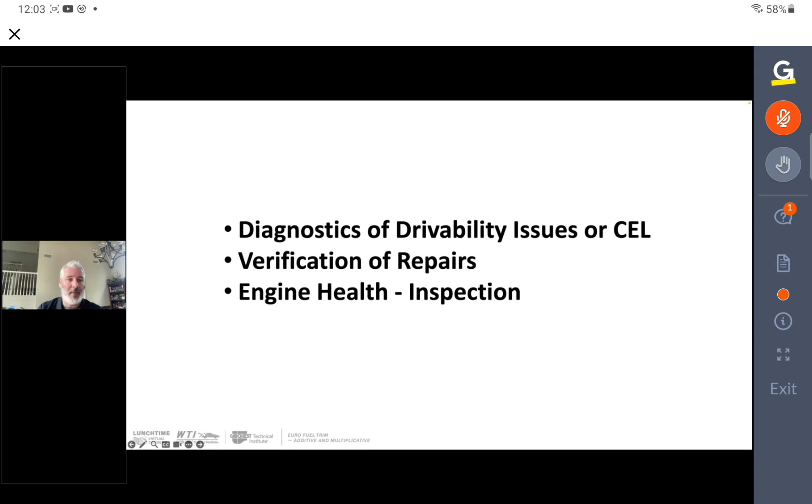It also helps you out, because the last thing anybody wants, whether it's the vehicle owner, the technician, or the shop owner, is to have a car come back not long after it left the shop with a check engine light on, saying, hey, ever since you guys changed the oil, now this check engine light is on. So if we can catch that and prevent it from happening, that's beneficial.

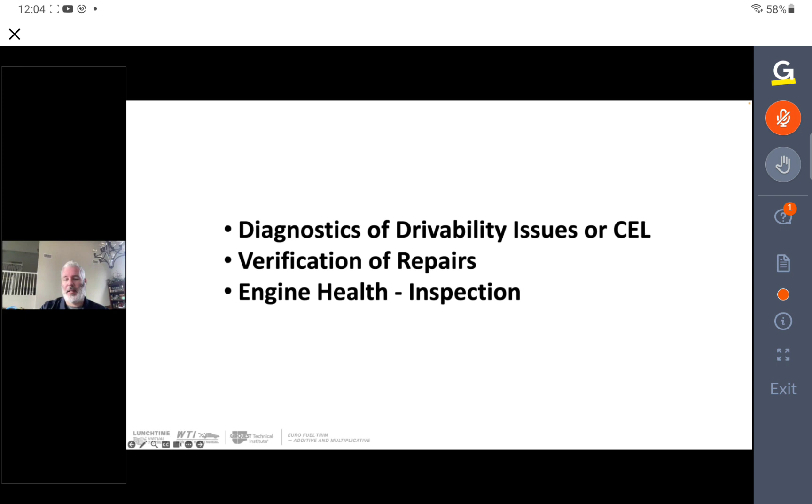But in order to use this data for any of these reasons, we need to first understand how it works. If you don't understand how something works, then it's useless, that's just called guessing. And we're all great guessers, I myself am a fantastic guesser, but knowledge is power. Understanding how fuel trim works, particularly on the Euro side, is going to be helpful to be able to use it.

So let's take a look at fuel control, we're going to start at the start here. So here we see a fuel map. This is a 3D map, so we're showing multiple different points of data here.

Running up the length of this on the vertical axis is your injection quantity, displayed in milliseconds. This is the amount of fuel that's being put into the engine, into the combustion chamber via injector open time, that's our injection quantity. Along the bottom we have our load axis and our engine speed axis. Along the load axis, you can see that fuel is obviously added as load increases, so as load increases, the fuel quantity is also increasing.

If we look along the engine speed axis, we can see it really doesn't have a massive effect on fuel. Obviously it has an effect, but nowhere near the same as load. If we look at the bottom end of our load spectrum and follow along engine speed, there's really no additional fuel being added, because no fuel is required as engine speed alone picks up. All we're doing is essentially raising the idle speed at that point. While the injectors will be opening with greater frequency, the time between intake strokes is substantially reduced, so the actual amount of fuel required via the injector pulse width does not increase. That's important to realize, because a lot of fuel maps focus heavily on engine speed, but it's not nearly as big a contributor as load is.

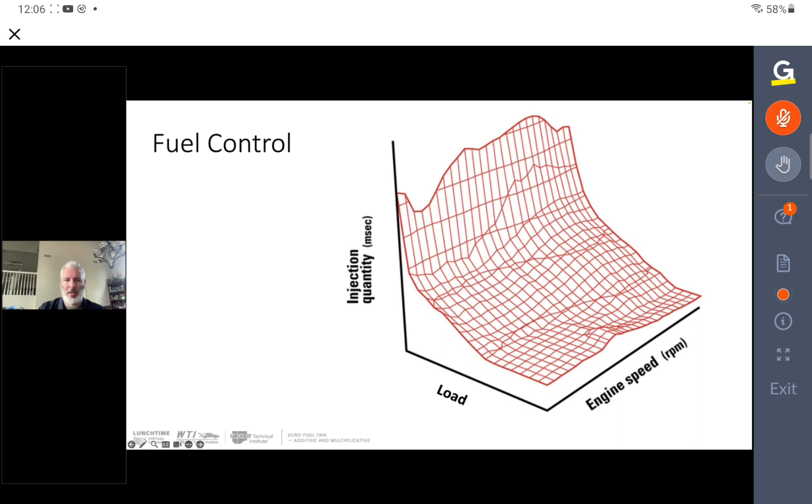Load is really what makes the difference on how much fuel is required. So to determine load, the engine is going to use data from sensors. On Euro vehicles, primarily it's getting this data from an air mass meter.

We have different generations of vehicles we're working on, and technology constantly changes. On the left-hand side of your screen you'll see an older style, very common traditional air mass meter using a hot film. Those were very failure prone. On the right side is a more modern style—we call these cartridge style air mass meters. That's typically what you're going to see on Euro vehicles over the last decade.

Because that earlier style air mass meter was so failure prone, due to deterioration and contamination, it was a high failure point, and it wasn't uncommon for many technicians to be replacing these as a maintenance item. At 75,000 miles, that air mass meter is probably not working the way it's supposed to anymore, and that's not a bad idea by any means. When they go really bad, they start to throw faults—fuel trim faults, fuel trim limits. Because that was so common, I now see, and have for a while, fuel trim faults just automatically getting an air mass meter thrown on if the vehicle has any kind of mileage, then reset the values and see what happens as a diagnostic strategy. But that is not a diagnostic strategy at all. That's a guess, right? It's a guess based on past knowledge.

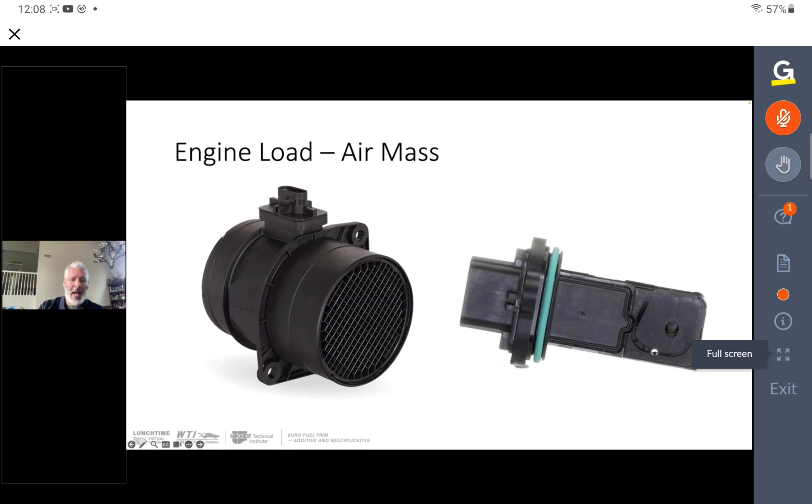The newer sensor works the same way, but how it gets that air is different, and that's what really makes all the difference in its reliability and robustness. In this image, the intake airflow comes in but then goes through a labyrinth passage, and a couple of things take place in that process. One is it functions like an oil separator—by going through this labyrinth process, oil, contaminants, dust, water droplets, whatever, can be captured and drained out before it even reaches the sensor element itself. The other thing to notice is the outlet, where that measured air is coming out, is pointing down, and that prevents airflow going back across it during reverse airflow. On that earlier style sensor, the film was exposed, and it didn't matter what direction the air was going in—it always went across it.

So now you're wondering, what do you mean the direction of the air? Air does move back pretty regularly on a vehicle. This happens anytime the engine speed slows down—this could be just regular deceleration, but also shifting gears.

When you shift gears, the engine speed's going to drop. Now, air moving into the engine has energy in it, known as velocity. But when it gets to the engine and combustion chamber, the pistons are moving slower, or maybe the throttle body just closed because you're in a deceleration event. That incoming air, that energy, can't be created or destroyed, so it stacks up against this slower moving component, whether it's a piston decelerating or a throttle body that just closed. A pressure wave builds up behind it, and it bounces back out.

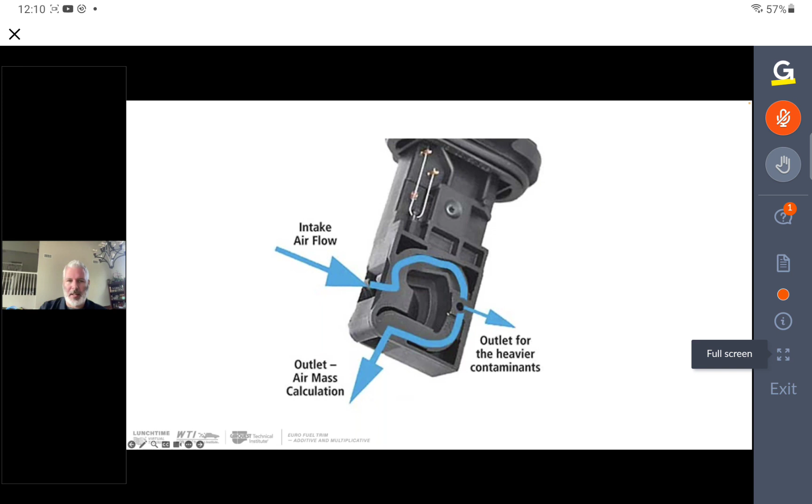These newer style sensors don't suffer with that, because as that air pulsation bounces back out of the intake, it goes around this meter. It's not going across the sensor element. As a result, these sensors are very reliable, very robust. They're not seeing the typical wear of an earlier style sensor.

Now, the other way to determine load is with speed density calculations. We can see an algorithm up here. The good news is you don't need to know what any of that means. It doesn't matter if it's written in English or not, because the software is doing that. All you need to know is that it's using speed density calculation.

Various inputs, primarily a MAP sensor measuring the absolute pressure in the intake manifold, combined with engine speed, throttle angle, and other inputs. The engine management system and software are able to calculate the load on that engine, and then determine the appropriate amount of fuel to deliver.

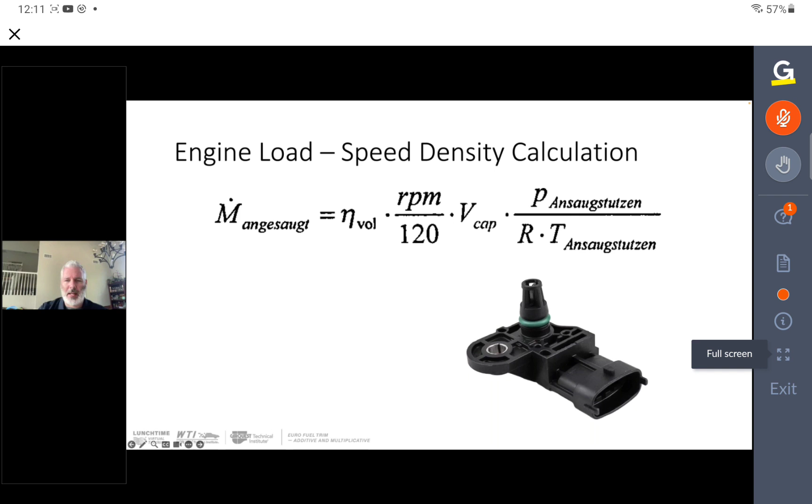So when the engine is cold, the air inside the combustion chamber is cold, the air inside the intake manifold is cold, and as a result, that cold air is not going to be able to hold atomized fuel as well. Because it's atomized fuel that we really ignite, it's important to add more fuel to ensure there's an appropriate amount to actually burn inside the engine. The other contributing factor is that cold air is dense air, meaning there are more oxygen molecules packed into the same volume. Since air-fuel ratio is really concerned with an oxygen-fuel ratio, we need additional fuel to make up for those additional oxygen molecules.

In fact, there is so much deviation in the amount of fuel necessary based on engine temperature that manufacturers have started to take advantage of that fact and actively control the temperature of the vehicle, not only to warm it up faster, but also to intentionally increase the temperature, running the engine extra hot in eco mode. The hotter you make the engine, the more you can reduce the amount of fuel used. You're thinning out the air and saving fuel. So if this vehicle is in an incredibly low load state, like cruising down the freeway, the engine management system can intentionally overheat the engine to reduce fuel consumption.

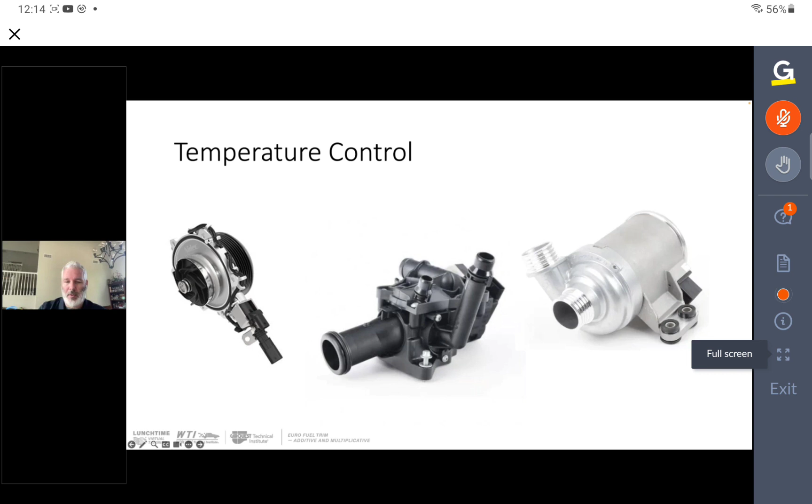During cold start cranking, there is even more fuel added. These are at engine speeds below 400 RPM, during that initial cranking phase, just to get that engine to do its initial fire. Look at how much additional fuel we could be experiencing in this situation.

But look at when it's colder, right? At 20 degrees Celsius, we're talking about 15 milliseconds of injector open time. That's 5 times more fuel than we would be seeing at hot idle - 5 times more fuel, that's 500% fuel increase during cranking. That is a tremendous amount of additional fuel that's necessary at this low engine speed in order to ensure that engine is able to fire initially and start. So temperature is very key, and it is very, very important.

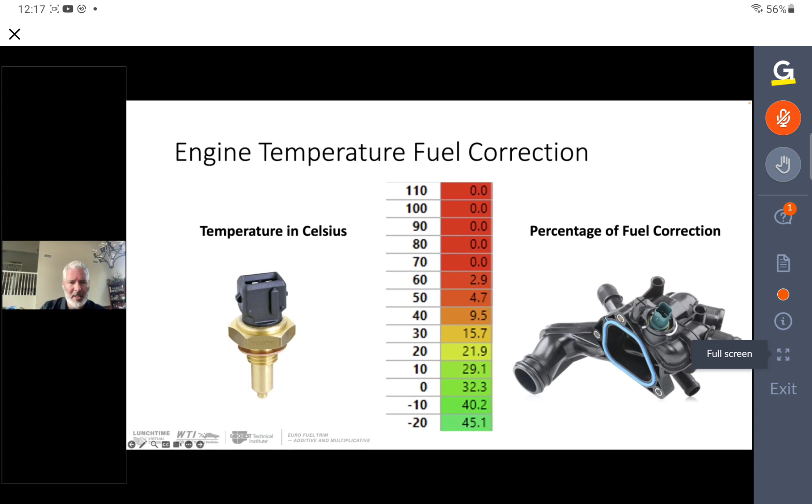And those will exhibit themselves as fuel delivery issues. Depending on how bad the temperature sensor is, it could just be a fuel trim related issue - the engine is running a little too lean or a little too rich and fuel trim is taking care of it. Or we may see it to the point where the temperature is so far off the engine won't even start - you have a crank no start situation, or an incredibly rough running motor during the warm up phase. So temperature is a huge contributing factor to the amount of fuel that's added. I want to make sure that we remember that and that we're aware of it.

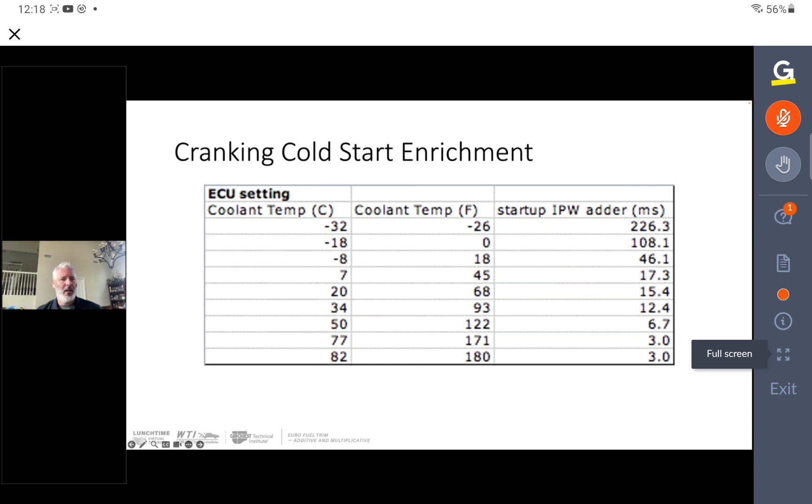So now all of this data is looked at: temperature, load. It's all calculated inside of the engine control module, and then applying that to the fuel map, the appropriate amount of fuel is determined. It's delivered to the combustion chamber. The combustion process happens, and then on the exhaust stroke, we have a sensor that measures those gases coming out of the combustion chamber.

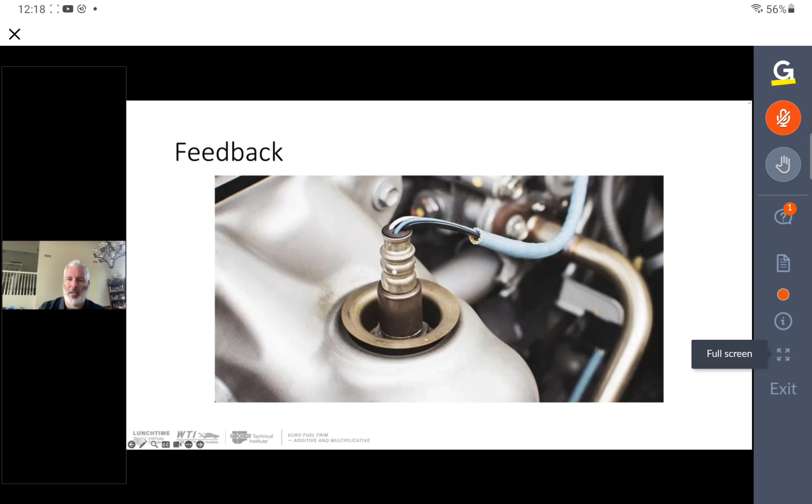So using an oxygen sensor, or a lambda sensor, air fuel ratio sensor, whatever nomenclature you want to use, that then picks up on that. And assuming everything was right, the data was right, the engine is healthy and functioning mechanically the way it's supposed to, that fuel should be delivered at an appropriate ratio, and it is confirmed by the engine management system by looking at this sensor. But that's usually not the case - these engines are not perfect, and so we have trimming taking place.

By looking at data from that oxygen sensor, the engine management system can determine if it's running the appropriate air fuel ratio. If not, it can add or subtract a little bit of fuel, and that is known as fuel trim.

Fuel trim is divided into short-term and long-term. Live in the moment adjustments are short-term. Every exhaust stroke, that data comes in and the engine management system makes slight adjustments, rich or lean, to get it into the perfect ratio for the catalytic converter's health. But if it's trending one way consistently, hanging lean or rich, the system says this isn't just momentary, it's a long-term problem.

It will shift that fuel trim into long-term, where the correction is applied always, regardless of engine running state, temperature, load, or engine speed. It's always going to add or subtract this specific amount of fuel to get as close as possible to zero trim.

And then let short-term make those micro adjustments from there on out. So that's long-term and short-term fuel trim. Long-term fuel trim is stored when the engine shuts down, saved inside the computer, and immediately applied on next startup. You can see that data PID in a scan tool.

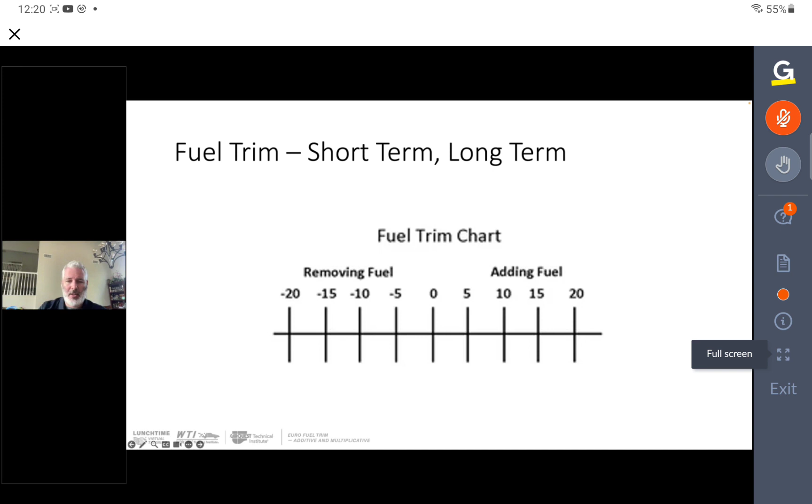But we're here to talk about additive and multiplicative, Euro fuel trim. So how does Euro fuel trim, additive and multiplicative, what European manufacturers are doing, compare to long-term and short-term fuel trim? Well, it works the same way. It's the same concept.

We have long-term and short-term fuel trim taking place. The only difference is that Euro manufacturers break their long-term fuel trim into two separate categories. So additive and multiplicative are both long-term fuel trim. This is the first misconception you may have realized. It's incredible how often I'll hear from technicians the belief that additive is short-term fuel trim and multiplicative is long-term fuel trim. That is not true. They are both long-term fuel trim.

So does that mean European manufacturers don't have short-term fuel trim? Of course not, they definitely have short-term fuel trim. It exists, that PID is available in your scan tool. It just won't be labeled as short-term fuel trim because they don't use that nomenclature. What it's labeled as is totally dependent on the scan tool, the manufacturer, and even just the year and engine being used.

Common phrases are oxygen sensing, a very common phrase you'll see. Another one is lambda. I've seen one called oxygen sensor integrator. But these are all nomenclature used to describe short-term fuel trim, that's live fuel trim taking place, and almost always it's displayed as a lambda figure.

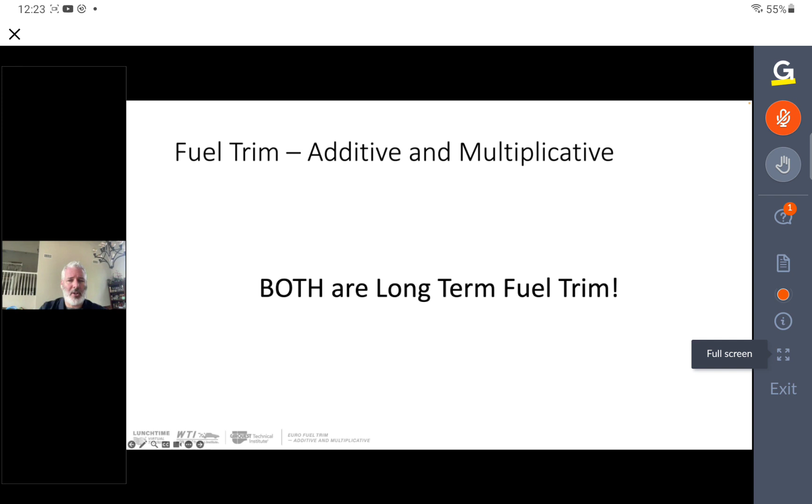The primary difference here with additive and multiplicative is how the engine management system uses long-term fuel trim, by breaking it into two categories. Additive is a long-term fuel correction for the idle range of the engine, and multiplicative is a long-term correction for the part load range of the engine.

So why do European manufacturers do this as opposed to long-term, short-term fuel trim, which we see in so many other manufacturers, domestic and Asian? It has nothing to do with them choosing not to do it that way and wanting to do their own thing, but rather that's just how they've done it. European manufacturers have been using oxygen sensor feedback control and fuel injectors for a long time. In the late 80s, early 90s, manufacturers said, hey, we should store this data.

Our computers are getting more powerful, there's more memory on board. We should store this data so that we're not always having to make these adjustments. And when we see these trends, why not start it off right away as soon as the engine starts?

And so the idea of fuel trim was developed, and most manufacturers were buying their components from Bosch, and that was the way Bosch did it. Bosch said, hey, this is how we should break this up and do it.

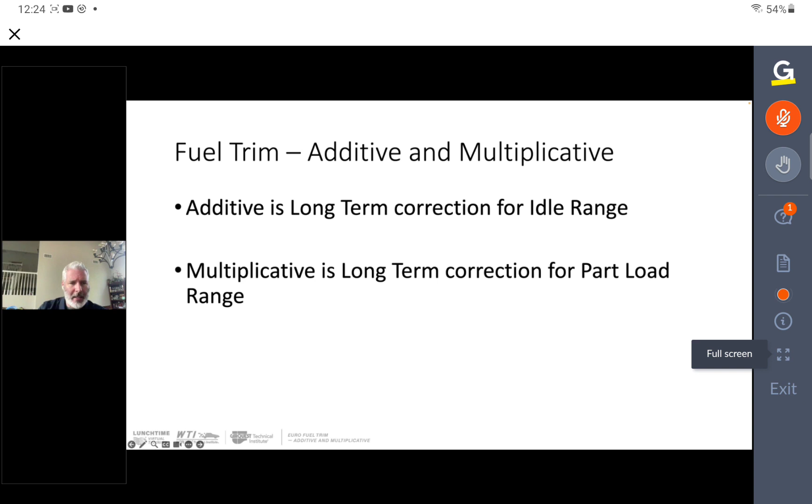Okay, but what about all these other areas, right? What about the fuel trim that takes place when we're outside of these two operating modes? So let's first understand what the difference between idle and load is.

Idle has nothing to do with engine speed, right? That is idle speed. Idle itself just simply means no load, right? Now, we can't have zero load, right? Load is always going to exist in the engine. But idle simply means that we don't have any additional load. There's no additional requirements to try and move that car, right?

So the typical loads that we're going to see at idle are just always there. It's the mechanical load on an engine. So internally, just the fact that an oil pump is pumping oil, the fact that pistons are moving up and down, there's bearings, there's moving components inside of there, and that all results in friction.

That's load, right? The belt is driving components on the vehicle, whether it's an alternator or a power steering pump or an AC compressor, right? These are all things that are being driven by the belt. That's additional load on the engine. That's always there. It's always going to be there.

Manufacturers are doing things like moving to more electrical components and less belt-driven components to try and reduce that load, going to much thinner oil to reduce the load on the oil pump, and even variable displacement oil pumps to try and reduce that load overall.

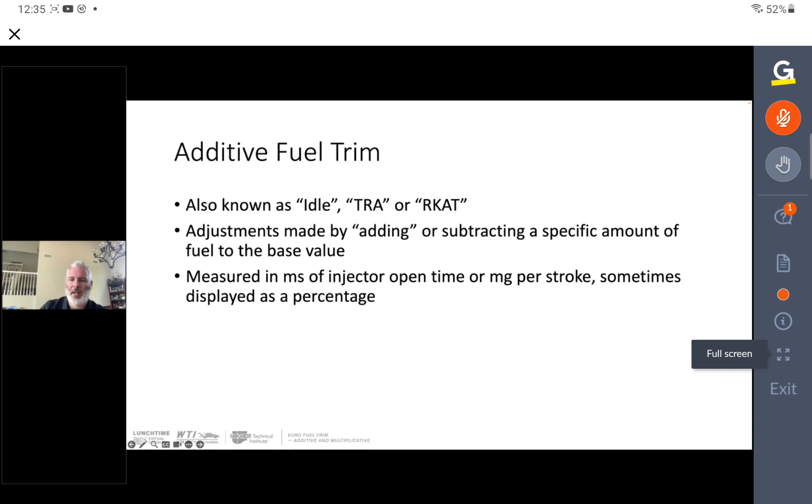Now, multiplicative fuel trim. This is also known as our part load fuel trim. You may see that being labeled in a scan tool or in technical literature as FRA or Frau. I presume that this is German for a word that means something totally unrelated, but that's what it translates to. So you may see that referred to as FRA, Frau, part load, or multiplicative. Multiplicative is a pretty common term that you will see being used there.

These adjustments are made by multiplying, hence the name, a specific amount to the base value. This will be displayed either as a multiplier or a percentage. When it's displayed as a percentage, it's pretty straightforward. We can wrap our head around that. We know that 10% means 10%. But when it's being displayed as a multiplier, I think this is where sometimes it trips people up. A multiplier value is the number we're going to multiply that base value by to get our new injector open time. So zero correction would display as 1.00, because 1 times anything equals itself.

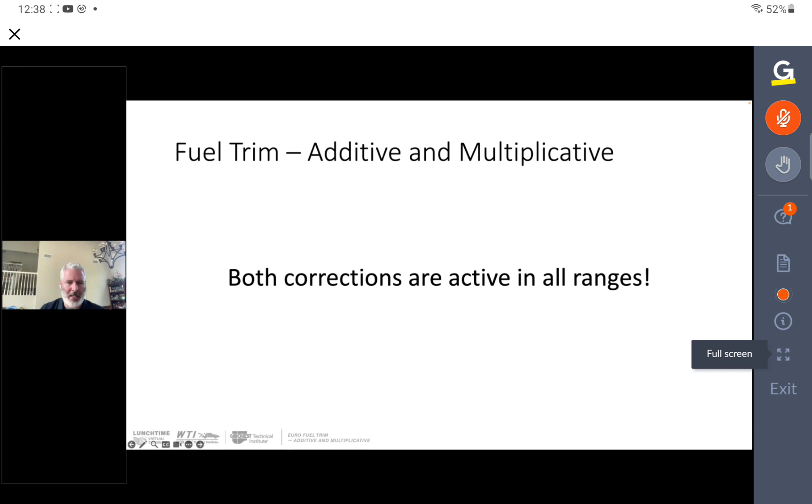Remember earlier I talked about that chart and what happens as we transition from one range to the next. Well, there's no transitioning from one range to the next because with additive and multiplicative fuel trim, both corrections are active in all ranges. So that means if we have an additive fuel correction, plus or minus whatever milliseconds, that is being applied in all instances. It doesn't matter if that engine is at high load or low load or idle, it is always adding or subtracting that set amount of fuel. It's long-term fuel trim and it is applied under all driving conditions.

The same is true of multiplicative. A multiplicative value is being applied at all conditions. If you have multiplicative fuel trim, that is also being applied at idle. So a multiplicative value of 1.10 or 10% means it's going to add 10% at idle also. So these are both playing together at the same time, and that's why there's no transition from one mode to the other that's going to result in any kind of hiccuping or hesitation as it moves from one type of fuel trim to another. They're both being applied.

The difference is whether it chooses to apply fuel trim to one or the other. Remember, fuel trim is happening because of a trend. The engine management system is looking at values on short-term fuel trim, and if it sees it trending one way or the other consistently, it's going to apply that to long-term fuel trim. The difference is, where is that trend taking place? Is that trend taking place at the idle state? So in the idle range, the idle zone, this is where we see fuel trim trending.

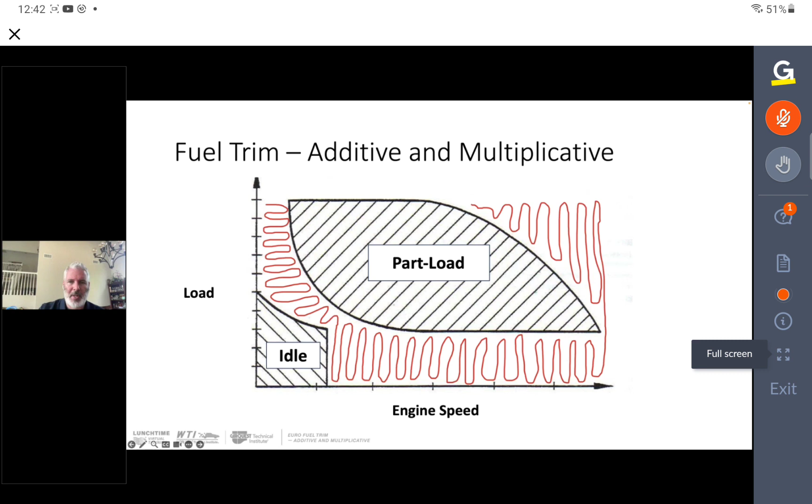So now that we understand additive and multiplicative, how the engine management system uses them, and that they're in use together at the same time - it's just the measuring process of when something moves from short-term to long-term, where it puts it, what two types of long-term fuel trim it puts it into. So now we're going to look at some samples here as we go through some diagnostic techniques.

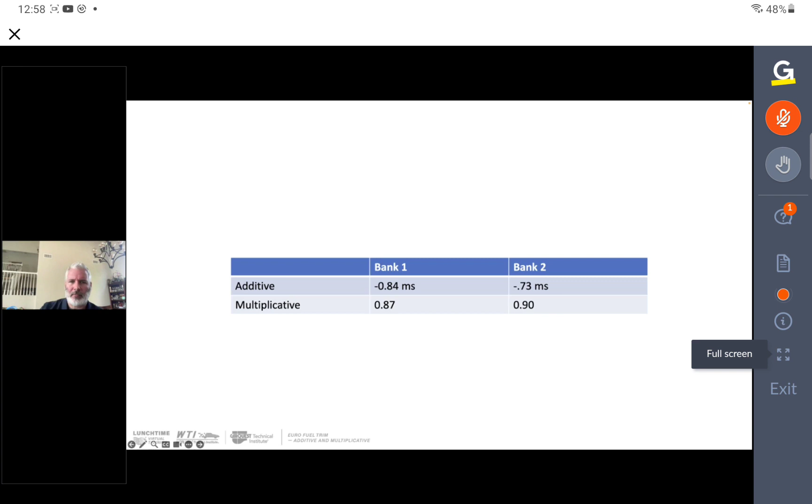It's the LSU ADV, and manufacturers have begun using this. One of the incredible things about this sensor is its heat-up time. This sensor is in operational readiness, ready to go into closed loop in less than 10 seconds after cold engine startup. That's amazing, right?

But the other thing it's able to do is react so quickly to changes in air-fuel ratio that at low engine speeds, it is capable of detecting individual exhaust pulses. It can switch so rapidly that this sensor is being used by some manufacturers for cylinder-specific fuel trim correction in the additive range. It's only doing it for idle, and I've seen manufacturers do this with up to 6 cylinders.

So this sensor is being installed in an inline 6-cylinder engine with just one oxygen sensor, and it is able to accurately determine individual exhaust pulses to make cylinder-specific corrections. The wild part is that data is not displayed at all.

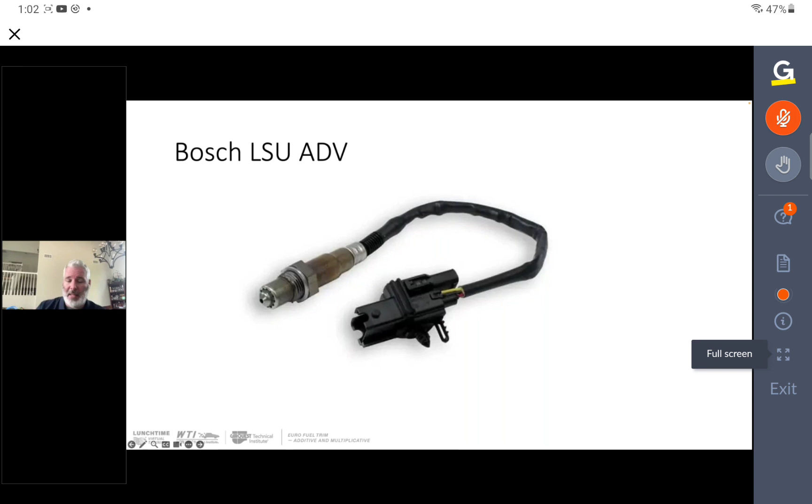As a result, you may see on these newer vehicles when scanning for fuel trim information, you don't even see additive fuel trim. So if all you're getting is multiplicative fuel trim, it's probably because it has this newer style sensor in it. Additive is still taking place, it's being done at the cylinder-specific level, and that information is simply not being displayed. The engine management system will add or subtract as much fuel as possible, as needed to correct that issue. And if it can't, it's going to result in a misfire, and that's the fault you're going to end up seeing.

Direct injection, very commonly used - GDI - on vehicles now. How does fuel trim work in this type of engine? The same way. The only difference is what it does with that fuel trim information. It still has additive ranges, it still has multiplicative ranges for those idle and part-load zones of the motor.

The difference is that the injector open time on a GDI motor is way less than 2.5 milliseconds at hot idle - it's just under 1 millisecond. So that correction number will differ. Injector open time is a PID you can see in the scan tool, so you can look at what the injector open time is and correlate what your additive injection translates to - is it a lot or is it a little?

And then multiplicative fuel trim adjustments are going to be made on the systemic level. So if the whole engine needs a substantial amount of fuel - 10%, 12%, whatever - added or subtracted, that is not being done with injector open time, but rather with the quantity control valve or whatever the manufacturer calls that device.

It is the solenoid on the inlet side of the high pressure fuel pump that regulates the amount of fuel coming into the system, which has a secondary result in fuel pressure going up at the rail, up to potentially 200 bar in some engines. That is how they regulate systemic fuel trim.

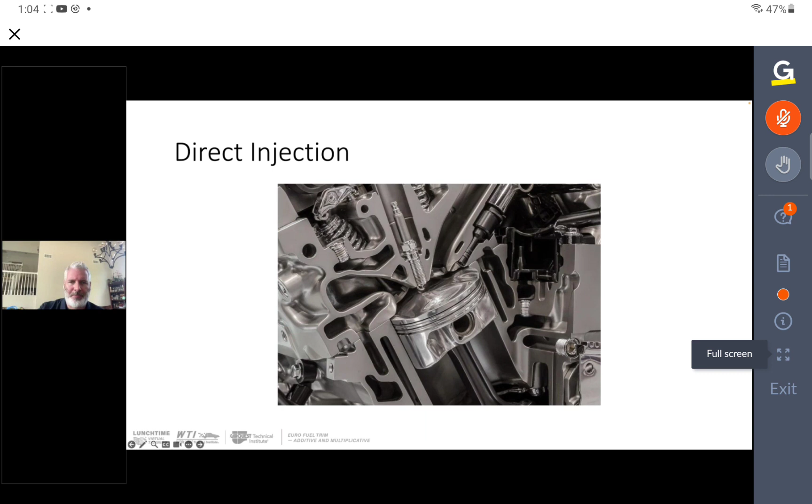And then lastly, turbos. What about turbocharging? What effect does that have on fuel trim? It doesn't have any effect on fuel trim. It still functions the exact same way. Fuel trim works identically, regardless of whether there's a turbo on there.

One of the advantages to GDI and turbo is more sensors on the car. So a lot of things that could have resulted in fuel trim issues are actually going to be caught before that case.

In the case of turbocharging, an example would be a boost leak. Our intake is not sealed appropriately, so we have a boost leak. That's air that's being measured coming into the engine, but then it leaks out before it makes it to the combustion chamber, which would result in a rich condition because additional fuel is being added, but there's no additional air to go with it.

But before that even becomes a fuel correction or a fuel trim problem, the engine management system is going to recognize that boost leak through the pressure sensors on the intake manifold, and it will immediately set fault codes related to boost problems and air management problems long before fuel trim ever takes place.

So when you're seeing fuel trim problems on a turbocharged direct injected engine, those systems are already being highly looked at, and any faults that take place in those systems respectively are going to trigger long before a fuel trim related issue happens. So from a diagnostic standpoint, these new technologies are not making any difference to the diagnostic strategy of fuel trim.